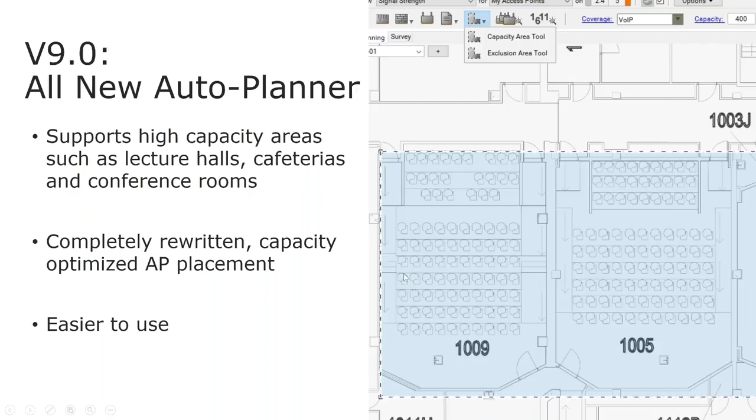So previously you were able to just draw areas and define capacity across the floor or across the building. But 9.0 has been completely refactored in terms of the auto planner with high capacity areas in mind. So it allows you to define the areas, low capacity areas, high capacity areas, for example, lecture halls, things like that. And the whole thing is completely rewritten, not just the auto planner, but the capacity analysis part as well. And it's easier to use, which I'm sure you will see pretty soon.

A couple of new features that we needed to add to the auto planner: since Wi-Fi evolves, so must our auto planner. So the auto planner now supports dual 5 GHz APs. It's pretty conservative in moving the APs to dual 5, but Mikko, isn't the feature such that you can check whether you want to use dual 5 or not, and then it will use that, of course, if available in the APs? That is correct. And how many APs do we have that support dual 5? The Cisco 3800, some of the Aerohive 250. Yeah, was it something like 4 or 5? I don't exactly recall that, but basically all of the available APs that support the dual 5 gig mode.

Okay, very cool. And I guess the more significant feature for most people is that it also disables unnecessary 2.4 GHz radios. We'll take a look at that as well. But it only disables 2.4 GHz radios if it sees that there's still enough coverage on 2.4. So if you, for example, have quite a big offset in terms of transmit power, a much lower transmit power on 2.4 and a much higher one on 5, then it may choose not to disable 2.4 radios because you might not get enough coverage. The tool also prevents AP overpopulation.

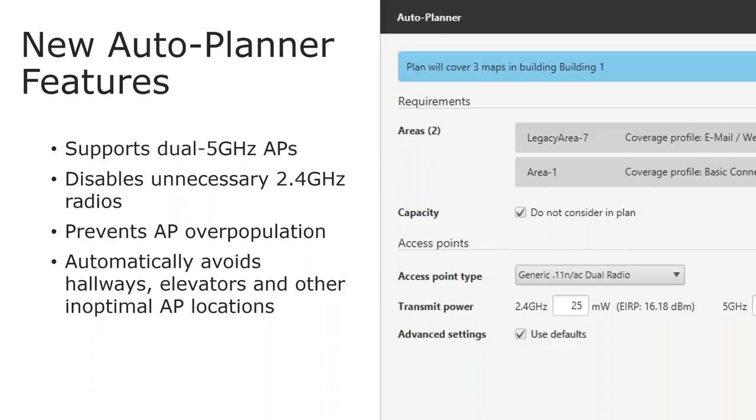And using a similar idea but different implementation, the autoplanner now understands where the hallways are, where the elevators are, without you marking them on the map, and it tends to avoid placing APs where possible in the hallways, in the elevators. So it just makes the planning process a bit more quick, a bit more simple.

And then the tool provides you more tools for high capacity analysis as well. So one feature that we are very proud of and that we put a lot of effort into is the airtime utilization heat map. It allows you to analyze the Wi-Fi air in quite a robust and accurate manner, and we'll take a look at that during the demo as well.

It just makes Wi-Fi more understandable and gives you guidance on what factors you should consider when making the network design, whether band steering or transmit power differences, or minimizing the amount of management frames with low data rates, things like that, by disabling low data rates.

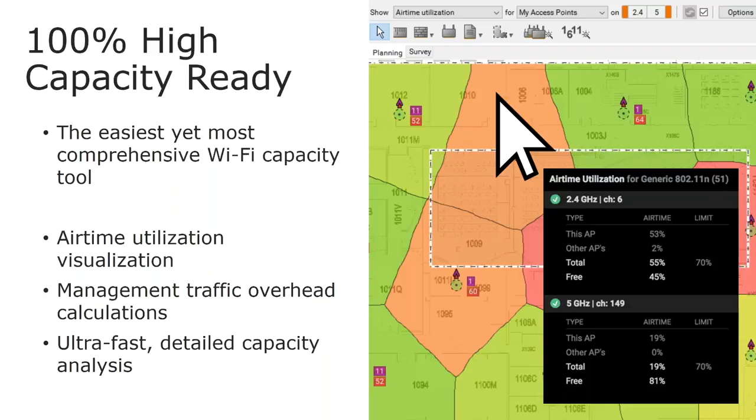So that's all I have in terms of the slides. So I think we're good to go for a demo. There are certainly questions, and we already received several questions. Just a second here, let me switch to the application. So just to address a couple of frequently asked questions.

First one is, I'm now on 8.7, how will I get 9.0? So if you have a valid annual support contract with Ekahau, the 9.0 upgrade is free. You can just simply start ESS and it will tell you a new version is available, hit the download button, and there you go. There are no additional charges or fees involved. So pretty simple upgrade.

And the other frequently asked question is backward compatibility. So version 9.0 can read files from the older versions as always, but if some of your teammates are running 8.7, for example, and you update to 9.0 and save a project, then your team members on the older versions of the tool will not be able to open those. Mikko, is that correct? And have any other frequently asked questions popped up already?

So I only heard the last question. Yes, we do have lots of questions, but what was the question before that? I'm all busy already replying to all the questions. Yeah, I mean, how do I get the tool and valid support contract, stuff like that?

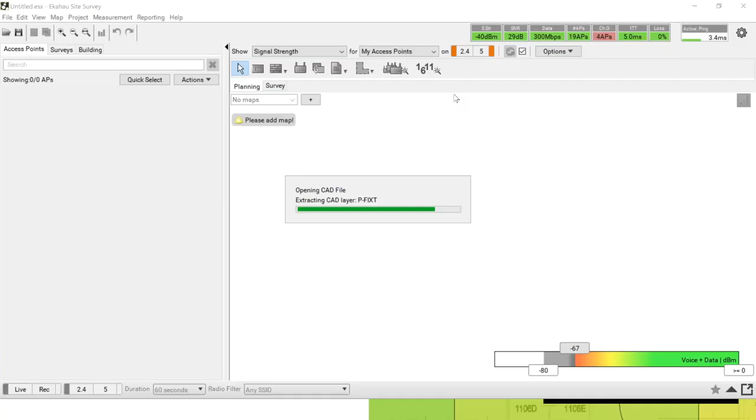So as always, we start by adding a map, and this is a university map that I've found on the internet. Thank you, universities, for sharing your floor plans there. It's much appreciated. Going to just change the layout. And this is a typical CAD floor plan, right? Pretty typical, but also the best case scenario in the sense that there are just a few layers on the CAD drawing. The scale comes automatically as always.

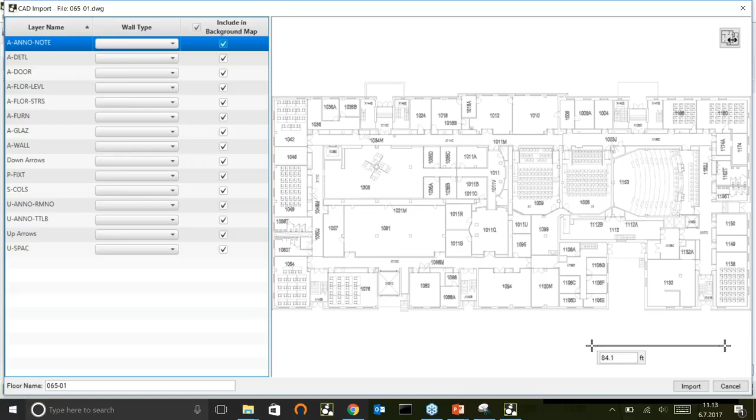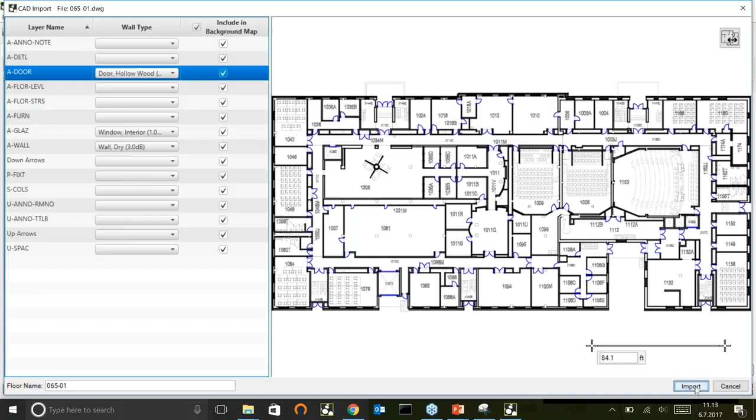Then, as you can see, blue color indicates interior walls, so we will map that as drywall. And then we have some windows, or Glas, as us Germans would call it. Also gonna put in the doors. And that looks pretty solid. I mean, we can work with that. Scale seems correct, so we'll just hit import.

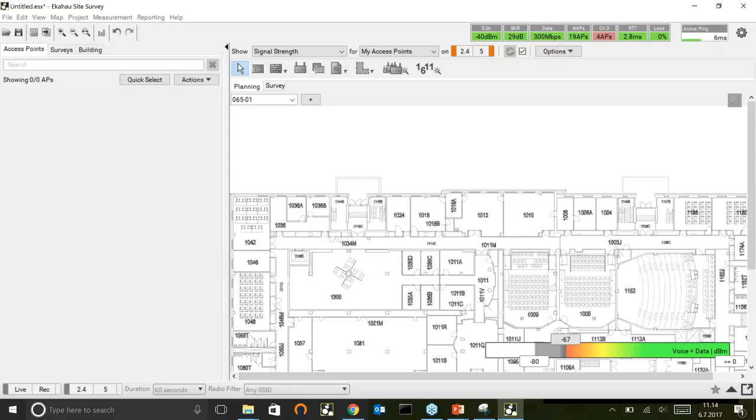Just to have a floor plan, and the CAD import, as you know, has been there already since 8.0 maybe. So nothing new really here. There we go. That's a pretty decent floor plan right there. And if we go and see the walls, yeah, there's the walls, there's the windows, it's all there. I'm just gonna hide it because we won't be needing those.

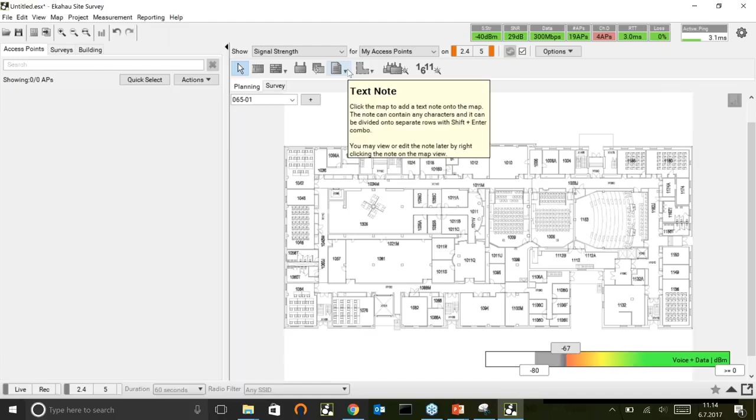All right, then off to the new stuff in 9.0. First of all, there's the area tool, which is now two different tools actually. It's the area and the exclusion area. And the area is used for both capacity planning and plain coverage planning. And it works pretty simply. You take the area tool. Here we have the selector for what kind of coverage you want to deploy.

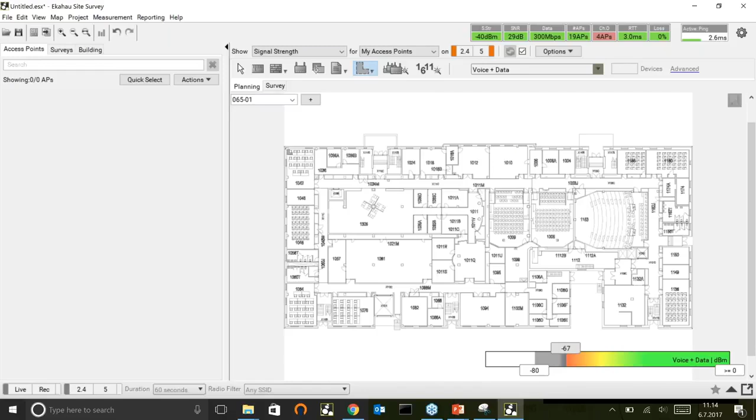So we're going to do the basic voice plus data, which means, if I recall right, is it -67 or -65, something like that. But a pretty general best practice for voice. Mikko, you worked on the profile. What's our requirement for the voice and data? Was it -65 or -67, -67 most likely. All right, and of course we can go and tweak that as well. There you have it in the legend actually. Yeah, exactly. -67. There it is.

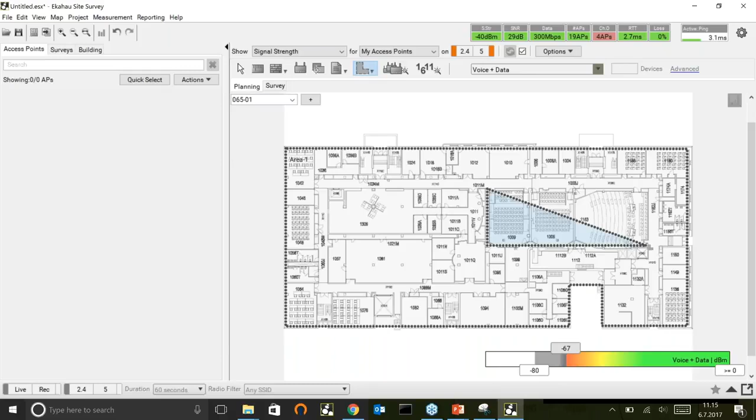So for the entire building, let's say we have a couple of hundred devices joining the network. So just punch it in here. So that area will now be designed for 200 devices and voice data. But then we have these lecture halls here in the middle, don't we? At least that's what it looks like, classrooms, lecture halls, stuff like that. And those would be your typical high density area. So I'm going to draw another area there and punch in 300 devices on that area.

There we go. So now what happens is these conference rooms obviously will have 300 devices supported, and then the rest of the area, excluding the conference rooms, will have 200 devices. Fair enough. And by default, the 300 devices, for example, means we have 150 laptops and 150 smartphones, because typically people carry both of them with them. And if we go to the advanced, we can see how that was divided.

So laptops with a pretty low SLA of 2 megabits per second, and of course all this is adjustable. And the smartphones, it's kind of assumed that people are using their laptops and they will have smartphones on the table just doing background synchronization and stuff like that. But all of them will be associated to the network still. So obviously you can change the number of devices, the type of devices, and the applications run on the device. And this is relevant for many reasons. Of course, how much applications are being utilized completely dominates the capacity planning of the network.

And also, if these clients are running VoIP, then the airtime saturation will happen sooner for VoIP clients than if you're using plain data. For example, with plain data, it's okay to have like 60, even 70% airtime utilization of the network, but for VoIP clients, 30% is already pretty much the maximum, if I recall right. So we'll just treat VoIP a bit differently, and we'll take a look at how that works.

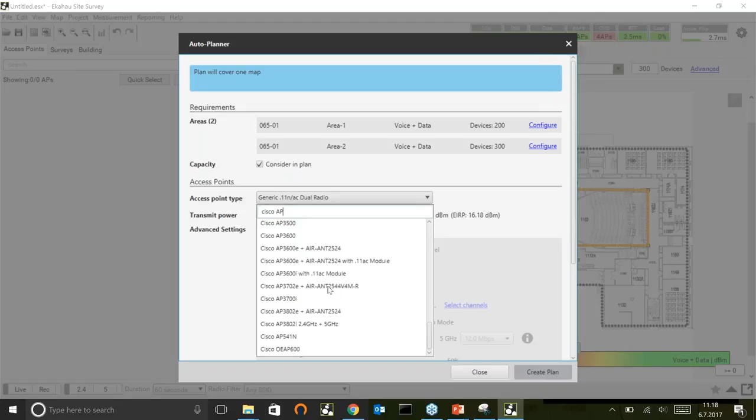So what do we do now? Now comes the new auto planner into the picture. We have defined the capacity, and at the simplest, it's just drawing the areas, putting in the numbers. So as we can see, we have 2 areas with 200 and 300 devices. We will consider capacity in the plan. We will put in, let's say, Cisco 3800s here. And by the way, we incorporated the search tool also in here, so it's easier for you to filter out the unwanted APs, stuff like that.

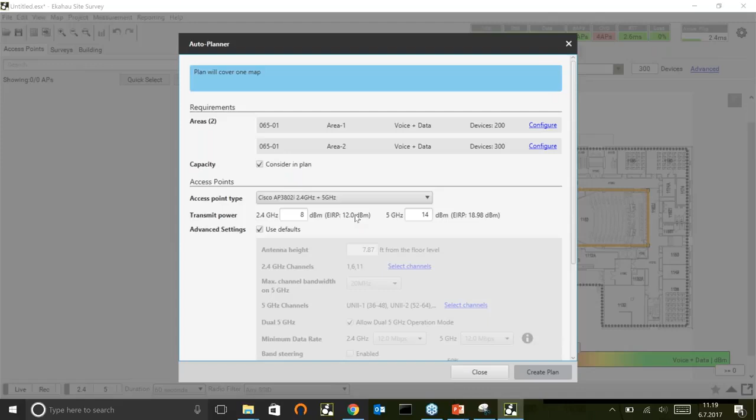So we're deploying Cisco AP 3800, 2.4 and 5 gigahertz configuration. And this is the ESS default. So we kind of try to steer you towards reasonable network plans by adjusting the default transmit power level. So we put them at 8 dBm for 2.4 and 14 dBm on 5 gigahertz. And that's kind of a reasonable default in our opinion. It could be 6 and 12 as well, but that's okay for now.

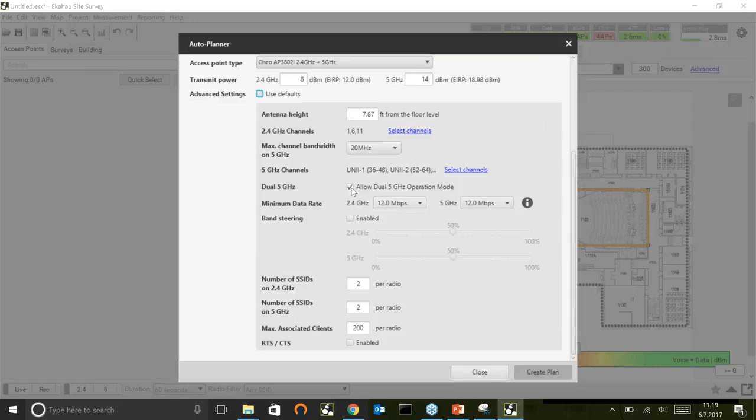Then we can use the advanced settings. There's a lot of new stuff here. For example, allow dual 5 gigahertz mode and individual selection of the channels being supported.

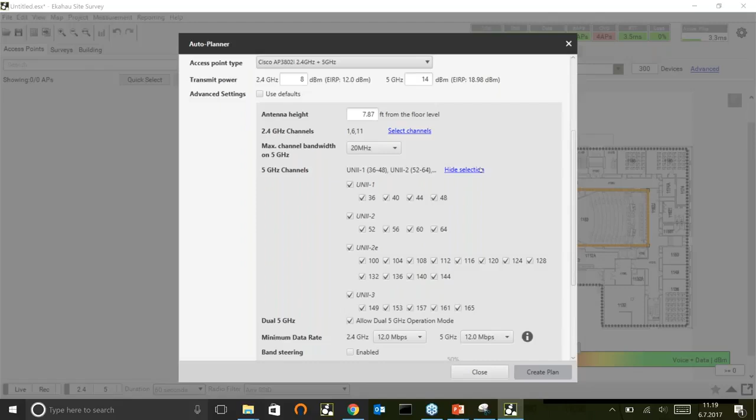Mikko, wasn't it so that this was a pretty frequently asked feature? Oh, absolutely. How many requests did you get for selecting the individual channels? Dozens, right? Absolutely, something that I didn't count anymore. Customers do keep on reminding us what is truly important, and this was definitely one of those features that we just had to do. Exactly, gun to your head kind of a thing.

Another thing that really matters when designing the Wi-Fi network is minimum data rates. So actually, I've been touring around the US now and been to, for example, different Marriotts. And greetings to IBAN. Could you please disable lower data rates in your networks, because it would function much better. So most of the Marriotts actually have all the lower data rates enabled, and excessive management frames, especially on 2.4.

Anyways, then there's a band steering configuration. So if your infrastructure supports band steering, you can set the targeted percentage of clients to associate on 2.4 and 5. But we're going to leave it disabled for now. Then you have the number of SSIDs, which also affects heavily the amount of management frames.

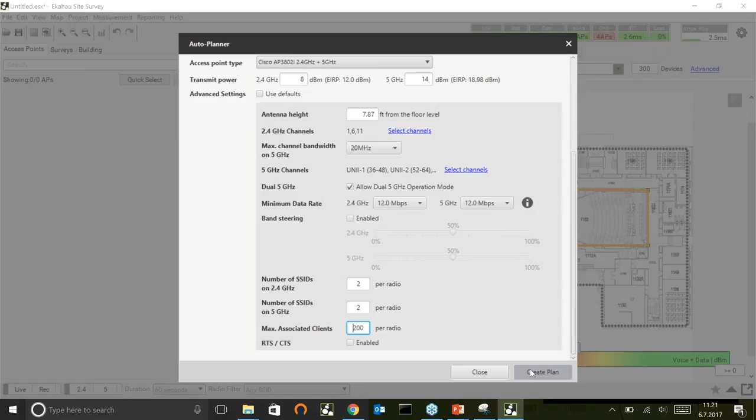And then you have maximum associated clients per radio. And this is not like maximum amount of VoIP calls per radio. We address that automatically in the tool with the visualizations. This is the association limit. Let's say if you have a humongous number of client devices just associated in the network, then this would be that, not the VoIP call limit. So we'll leave it at 200. It could be 100 or 50 or whatever. Then we'll hit create plan.

And it takes its time to kind of crunch the numbers, looks at capacity, looks at coverage, and gives you a warning. It pretty easily gives you the warning that all requirements may not be met. Please review requirements. And this is also there just so that a capable Wi-Fi engineer should always look at the plan. Although ESS these days, as you can see, makes solid network plans, the Wi-Fi engineer should still review the plan and adjust accordingly.

So as we can see here, how did the layout turn out? Pretty cool, actually. It's pretty close to what I would probably design myself as well for this kind of a network. So a couple of APs in the hallways, but most of them in the rooms. The high capacity area has more APs. There's less APs in the non-high capacity areas. We have just one 2.4 gigahertz radio disabled. It is because 2.4 was already set to a much lower transmit power than 5 gigahertz.

So Jerry, Nick, since you guys have actually designed and deployed networks for a long time for a living, what do you think of the plan? Oh, and actually, sorry, there's another 2.4 disabled here. But what do you think of the plan? I think it looks like a solid design. I think the spacing of the APs, staggering them out, looks solid.

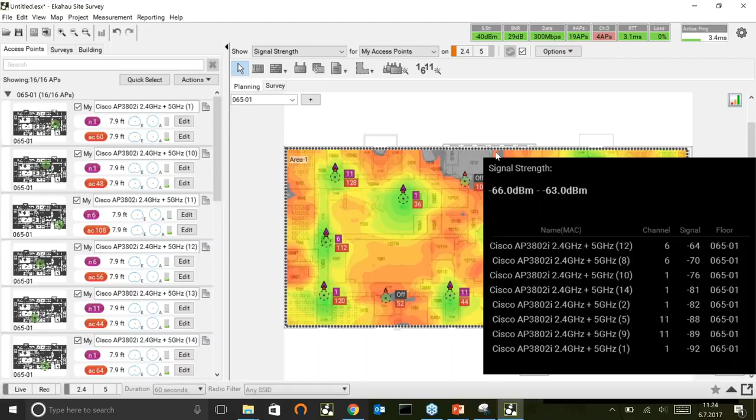Exactly, and unlike before, the algorithm stops when the spectrum is fully utilized, it doesn't add any more APs, so it never overpopulates, which is one of the key things here as well. So let's see how the plan looks on 5 gigahertz. Yeah, solid coverage, and on 2.4, solid coverage as well. But where we disabled the 2.4 radio, there actually is a small coverage gap here. So always review the design, go back, readjust if necessary.

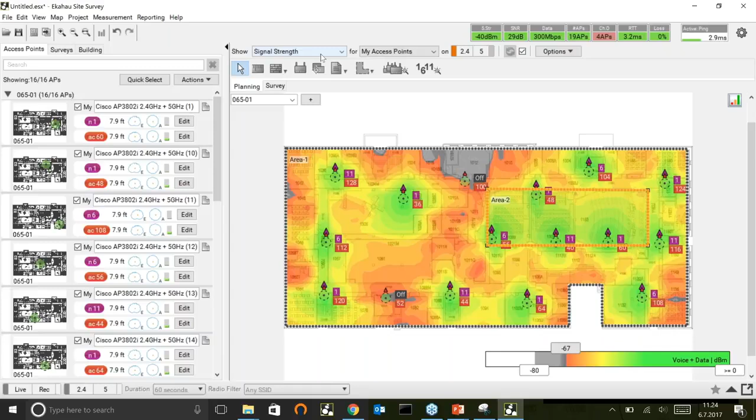However, one could argue that that's fine if your clients are mostly or all of them are 5 gigahertz capable. Then that kind of gap might be fine. And there's still coverage there, but it's just below -67. But again, always review the design. So that's signal strength. Let's look at channel overlap as well.

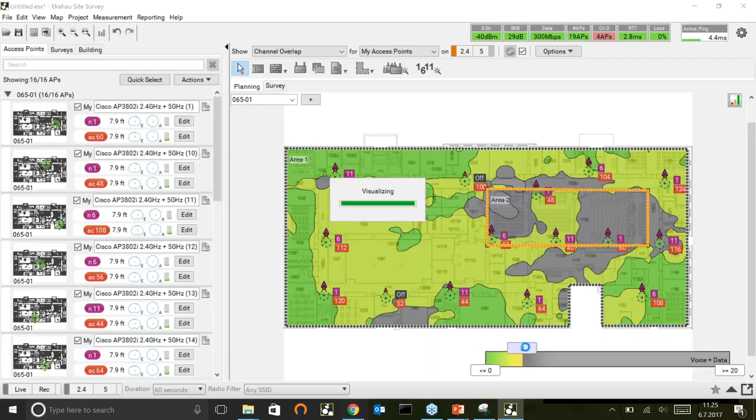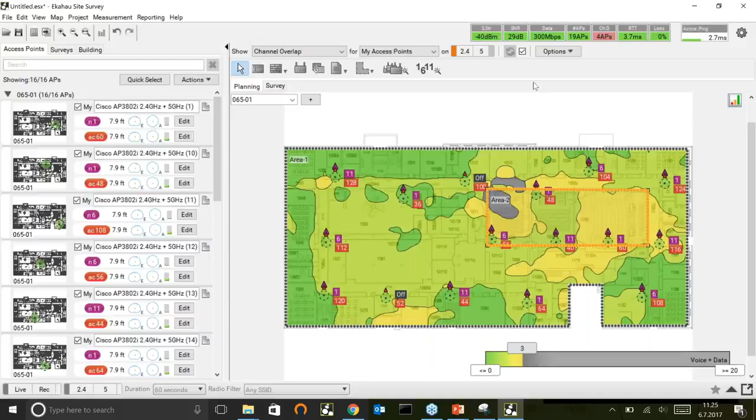So still pretty reasonable. In the high density area, there's no avoiding it. There will be some channel overlap, and we have a pretty strict requirement of 2 APs. So if we look at a bit more forgiving scenario of 3 APs, we can see that, yeah, actually the channel overlap is not awesomely extensive anywhere in the area. So pretty solid, and I'm assuming on 5 gigahertz, yeah, there's no channel overlap whatsoever because the channel planning algorithm did its job. So pretty good.

So far, so good. And here comes the new stuff. So first of all, capacity health is still there, but the capacity calculations are now just much more accurate. So let's look at capacity health to see if the network meets the capacity requirements that we have, which were pretty strict, like 300 clients in a pretty small area. And due to the extensive amount of client devices here, the tool does calculate for a while.

Good time to sip some coffee. So Mikko, how are you? How's Finland, Mikko? Wait, what? Nothing, just making a conversation. It's pretty cold. Oh yeah, I was trying to focus on the questions. Thanks, Jussi. Yeah, it's typical. I'm horrible like that. Sorry about that.

Anyway, so looking at capacity health on both 2.4 and 5, things look solid. So there's no red anywhere. So it does meet the airtime requirements, and there's of course no excessive number of clients. And by moving the mouse over any of the serving areas of the AP, we can see what's going on on those channels where the AP is serving at that location. So on 2.4, in this location, the AP is on channel 1. We have 46% airtime utilized. We have X number of clients there.

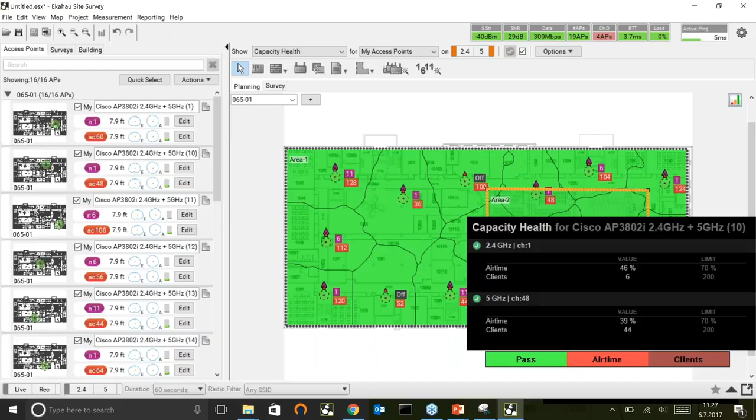And then on 5 gigahertz, by far most of the clients are on 5 gigahertz, which is how it's supposed to be. And then 39% airtime utilized. Okay, so far so good, and our artificial band steering using transmit power differences seems to be doing its job. The network's solid. Let's look at this a bit further. Let's look at airtime utilization. This is a new heat map that we came out with to give you better tools for analyzing the capacity.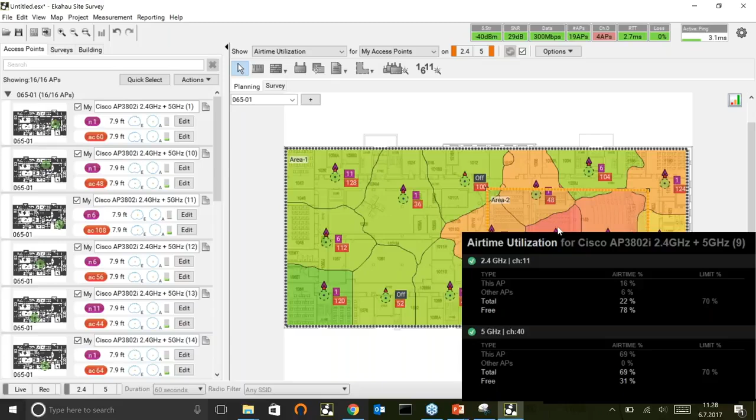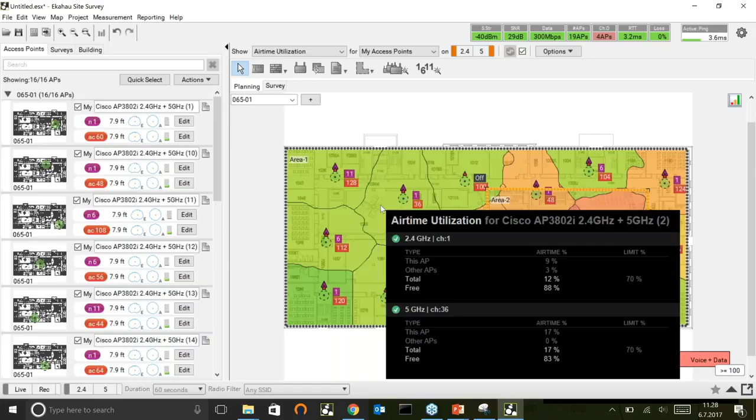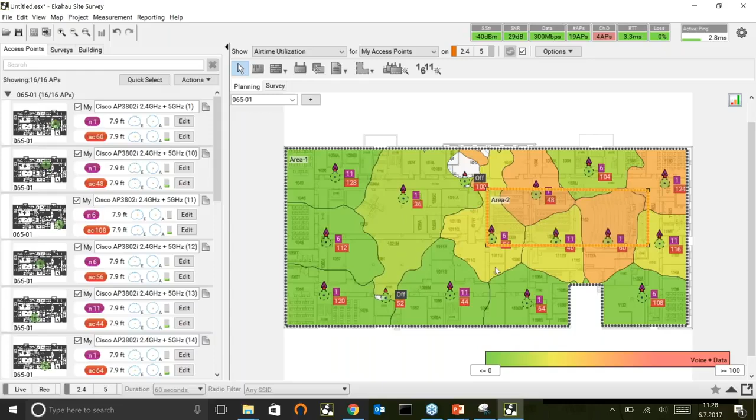Let's look at another AP here. There we can see that there's plenty of airtime available. On 5 gigahertz, we utilize just 17%. On 2.4, we utilize just 12%. That's one side of the story. The other side is, let's look at 2.4 gigahertz only. And we can see how much airtime is obviously utilized on 2.4, but then the tooltip gives us now more details on what's going on in the air.

So we can see on channel 6 in this location, how much is this AP consuming the airtime, how much are the other APs, so CCI, essentially, how much are the other APs consuming the airtime on the serving area of this AP. We can see how much the applications are using the airtime, different apps. We can see how the different clients are utilizing the airtime. And more importantly, we can see what frame types are utilizing the airtime.

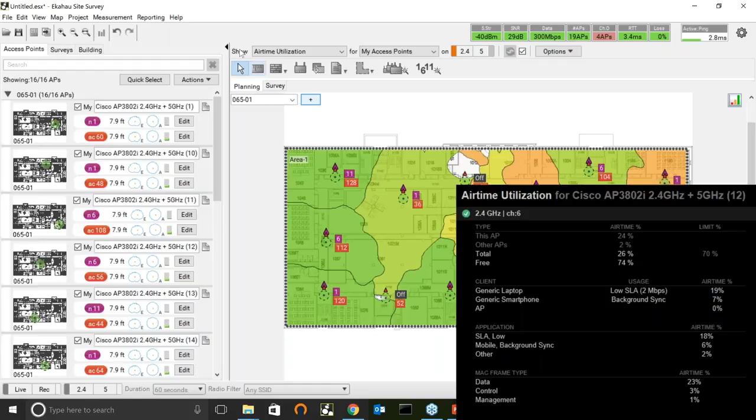So in this case, it seems solid. So 23% is consumed by data frames, so the vast majority, and then just 3% control and 1% management frames. So in that sense, also a pretty solid network, right? So this is all good, and we can see that, yeah, it's actually a pretty decent design that it made, and we provide you with tools to analyze the capacity quite effectively.

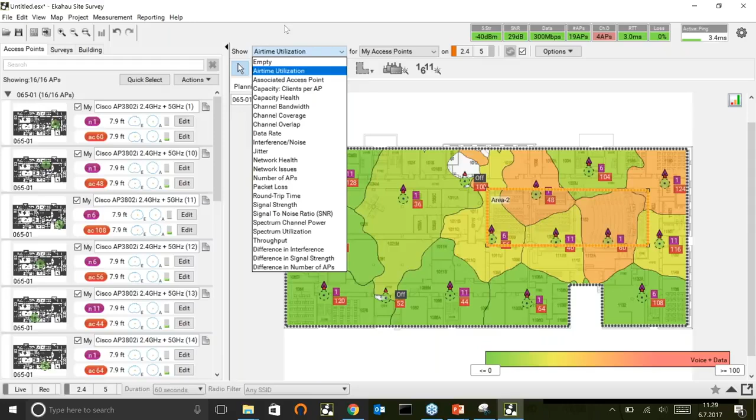But then let's do the typical mistake of making a not so solid network. So let's run the autoplanner again, and now this is like a don't try this at home kind of scenario. So we're intentionally making a bad network here.

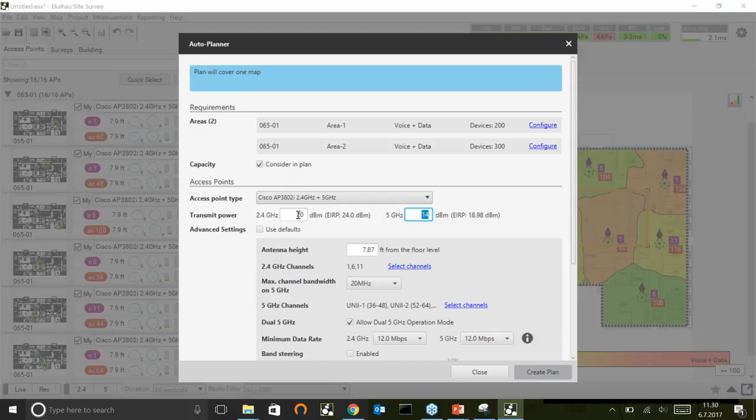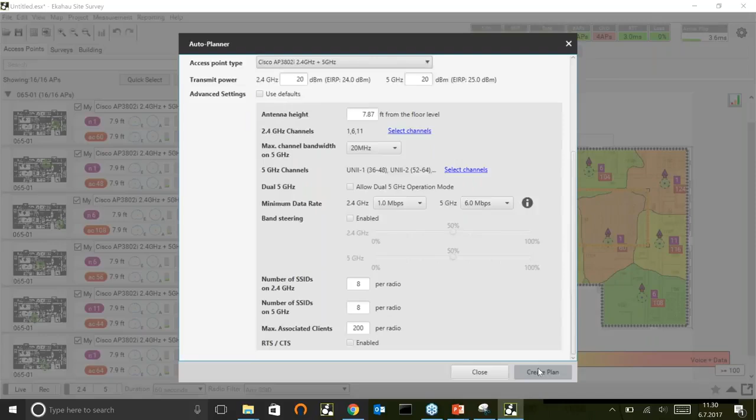I'm going to put in 20 dBm transmit power on both 2.4 and 5, so blasting full power on both radios, which is tempting, but hardly ideal in most cases. I'm disabling dual 5, I'm setting the minimum data rates to the lowest, so 1 and 6 megabits per second, and oh yeah, the more SSIDs, the better, right? So no, it's really not, but let's assume the customer wanted to blast full power, tons of SSIDs, all data rates supported, just plain don't-try-this-at-home type of a plan.

And then we recreate it with the autoplanner. Sure, the autoplanner will not refuse to make the network, just as we as Wi-Fi engineers don't refuse to make a network for the customer, even if the customer demands may be a bit interesting at times. So here we go. The autoplanner did a fairly similar network, but due to the maximal transmit power, it just could not place the APs as close to one another as before.

And then comes the interesting part once the calculation finishes, how much airtime is being utilized with this AP configuration. We'll look at 2.4 gigahertz here first. So how's 2.4 looking for this AP where we have the red color? Yeah, it looks pretty bad. 76% utilization, so over the limit, and the beef is below here. 21% of the airtime is utilized by management frames, which is hardly ideal. And this is because we increased the number of SSIDs and we supported the low data rates.

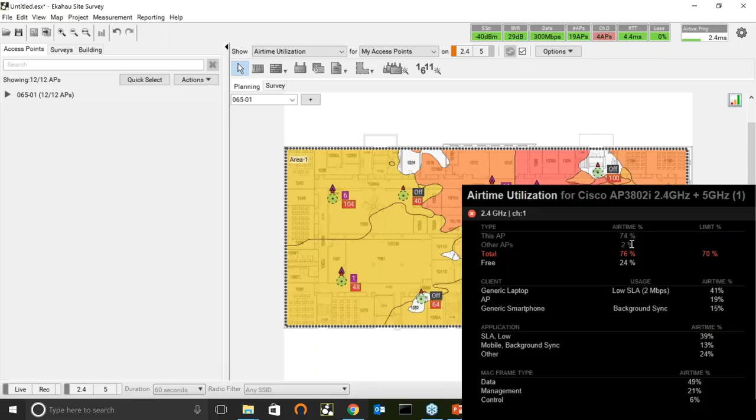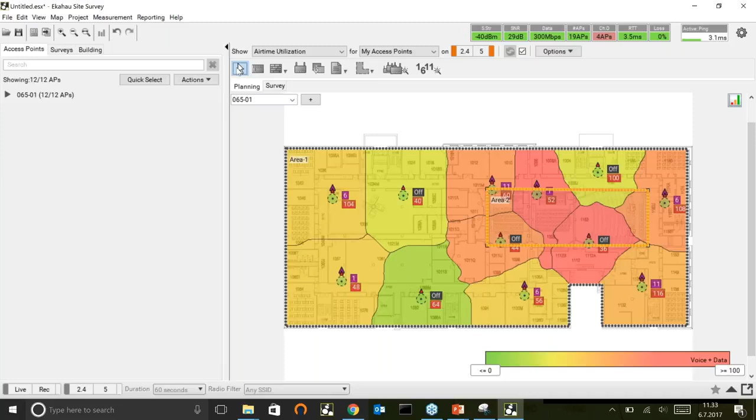Also, since the planner tries to avoid CCI, it made a pretty sparse network design. So we are only getting 2% airtime from other APs here, which is reasonable, right? But you can hardly make a plan like this work given the extensive amount of management frames. Of course, we could do some remedy measures here by utilizing band steering and trying to talk sense to the customer, trying to minimize the number of SSIDs, stuff like that. But that's kind of how things work.

Hey, yes, you had a good question about how do we define areas where we don't want coverage, where we don't want to be included in our design. Good question, Nick. Very good question, actually. Oh, and now I recalculated, so it will take a while. But there's a subset in the area tool called exclusion area, which then will exclude the areas from the design. It's a similar area drawing tool. I'll show it to you in a second.

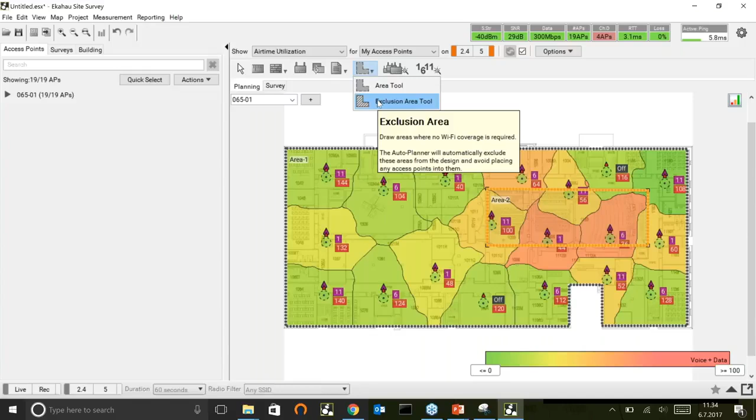It's a similar area drawing tool. But as mentioned earlier, elevators, things like that, the algorithm tries to naturally avoid, like small closets and elevators and obviously unreasonable locations for APs. So here's the exclusion area tool, similar to the area tool. Just press the down arrow here. You can utilize that. Good question, though.

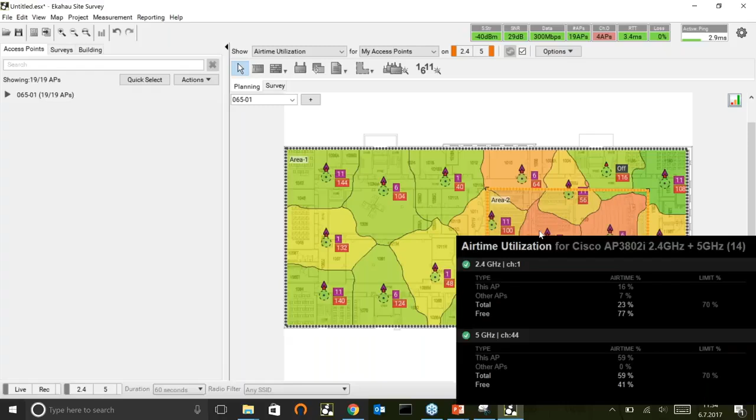Okay, so one more scenario that we could build here. Right now, I redesigned the network with a more reasonable transmit power configuration, and it looks solid again. You can access the network configuration later after running the autoplanner from project network configuration. Now we have reasonable minimum data rates, reasonable number of SSIDs per radio, no band steering. So what I'm going to do, and I don't think I've tried this with the 9.0, is introduce some legacy clients here and try to break the network that way.

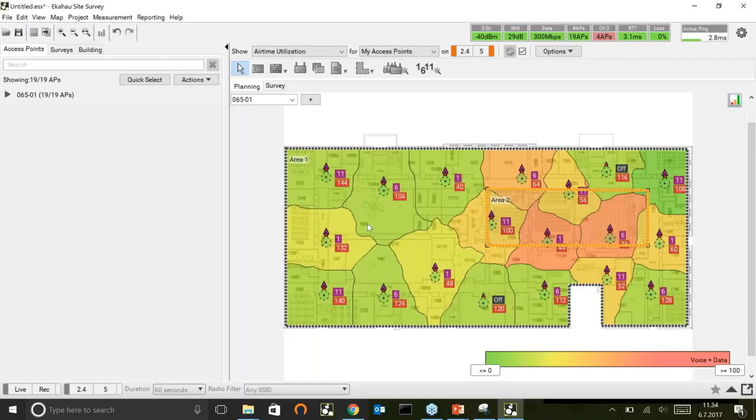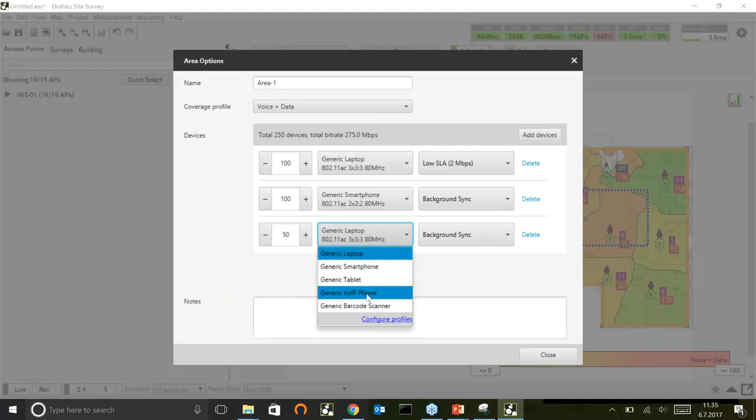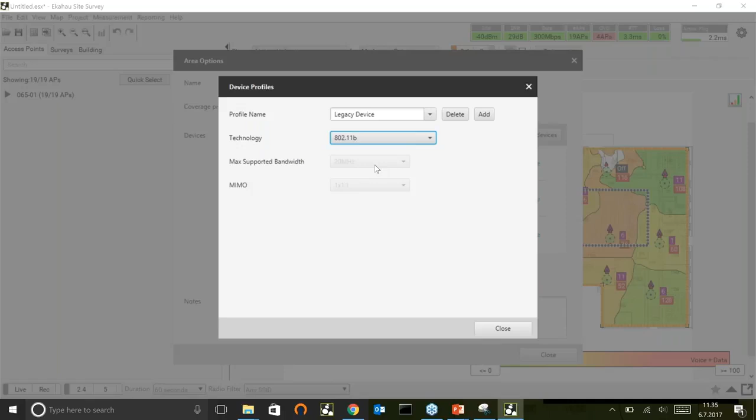So for example, on 2.4. 2.4 for now with this client device setup looks pretty good. So let's right click on the area, edit, and introduce some legacy devices into the network and see what happens. We have a generic barcode scanner. Mikko, do you remember what kind of barcode scanner we have? It's like 802.11b, is that correct? Yes. So let's put in a generic legacy device. Here we go. And then 802.11b, obviously 20 megahertz.

All right, so now we have 50 legacy devices in the network doing 2 megabits per second, which is pretty much the maximum they could do anyway, and then let's recalculate and see what happens. Only 50 more devices added, but those are 802.11b. So what happens to the network? Again, looking at 2.4 gigahertz, which obviously is where those devices would be added. This is also one more tool to convince your customer that it might be a good idea to update those legacy barcode scanners or whatever legacy devices you may have into something more modern, so to speak.

Time to sip some coffee. That's good coffee. I highly recommend Jittery Joe's coffee in Athens.

So we still have green here. Wow.

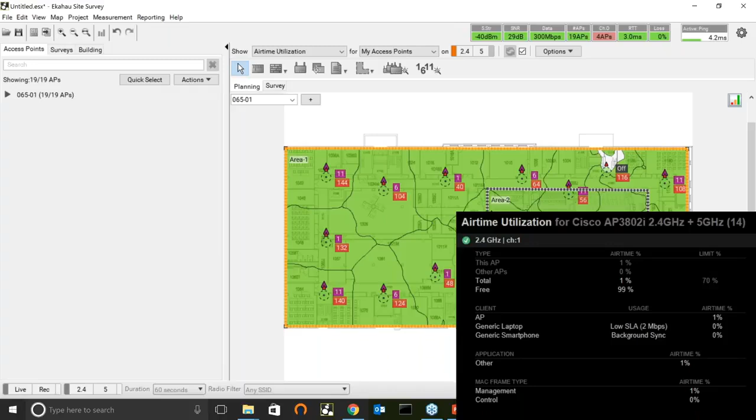Now I would need to go back to the drawing board and understand what was happening here. But it looks like the network can take those client devices. Hard to believe though. I'll come back to that. Could be a demo effect.

Anyway, so that's 9.0. Now would be a good time for any questions we may have. Nick, Jerry, Mikko, any frequently asked questions at this point? Well, one thing that came up yesterday was what happened to the area notes. Great question. Mikko, what happened with the area notes?

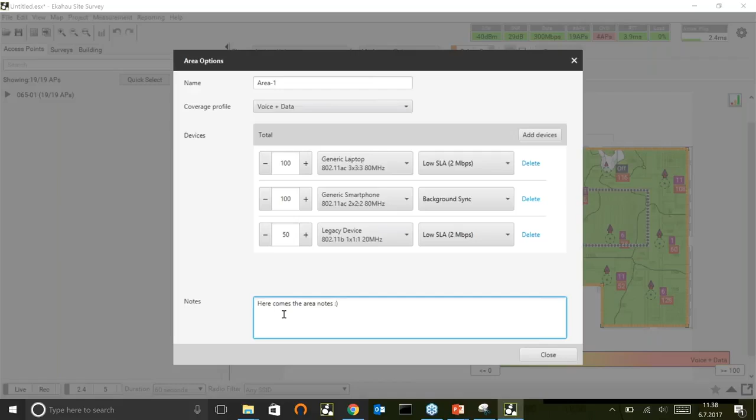Well, what happened was that we moved it under the area tool. So we believe it's now more logical to have it within the same tool, which is used to define your coverage and capacity requirements. Exactly. So if you right-click on the area and say Edit Area, the notes are actually here. The rest of the notes still stay in the same location, right? Any other questions?

There's actually plenty of questions, which is really positive. I haven't been able to reply. So. This is Jerry. I've got one question here. I guess this isn't directly new to ESS 9, but there's a question about the attenuation areas versus walls. Specifically, they were talking about in reference to warehouse shelving.

Excellent question. For those that don't know the concepts, there's a wall tool in ESS to define the walls of the building, obviously, and then there's the attenuation area tool, which is for areas that are larger than walls. But the question is which one should I use for warehouse shelves, walls or attenuation areas? And I would say it depends on the width of the shelf. So if it's a very wide shelf, you could use the attenuation area tool. Otherwise, you could use the wall because it's faster to draw.

But the propagation and calculation is actually identical if you do a similar attenuation area or a wall. Mikko, is that right? All right, you did it again. So if you do a similar attenuation area or a wall, the calculation should be pretty much identical. Absolutely. Yep.

This was pretty much the case after configuring those devices into the network. Hold on, it is still visualizing. So we were looking at 2.4, and I was wondering why it still shows green on 2.4 and hardly any associated devices, even though I had configured the legacy devices there. So it looked like this, just a couple of devices here and there.

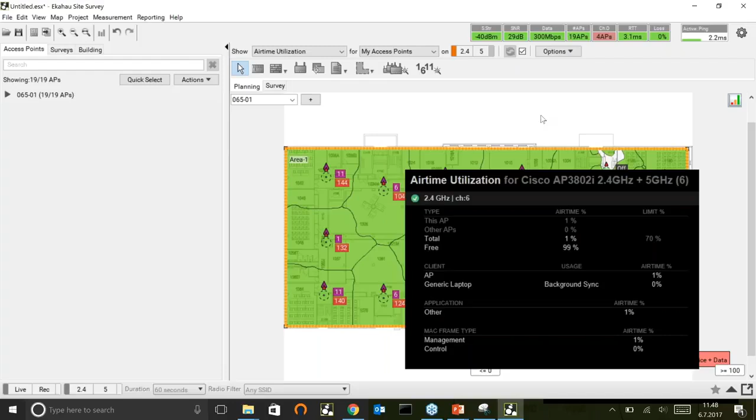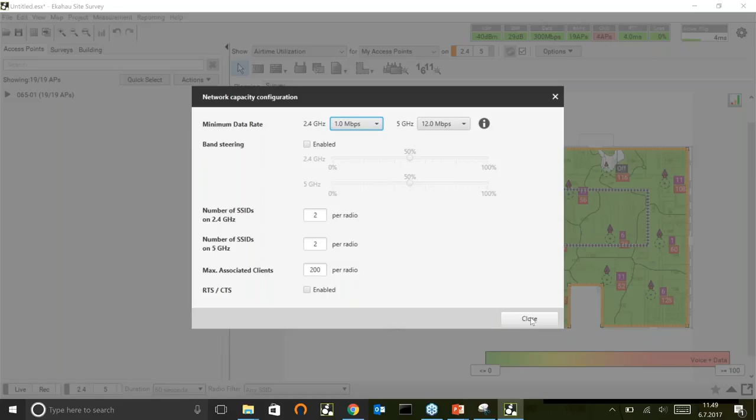And then I realized, I put 802.11b devices into the network, but here's how the network looks. It's not letting any of those 2.4 gigahertz legacy 802.11b devices associate, obviously, given that I've set the minimum data rate to 12 megs per second. So let's drop that to 1 meg per second and recalculate and see what happens. So wait for it, as they say.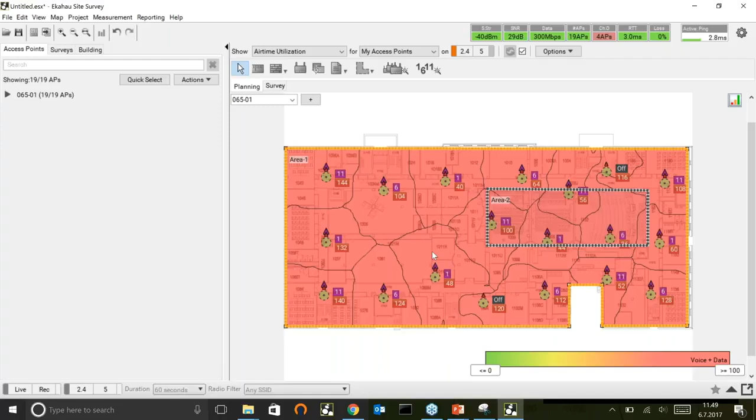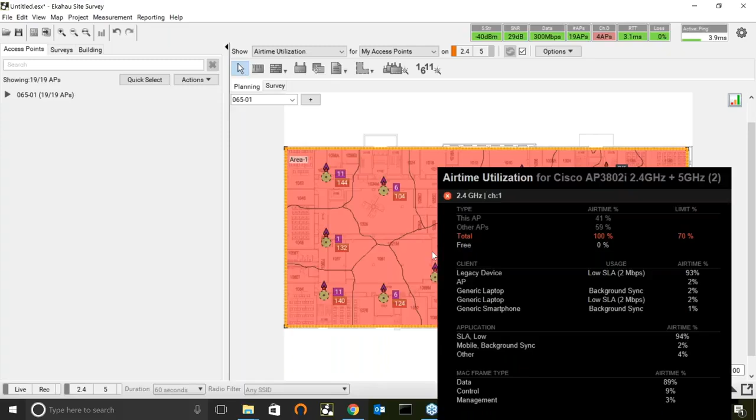So now that we allowed legacy devices to associate, of course, the network is flooded. And bear in mind, we only added 50 802.11b devices, 50, and it's dead. The network is completely ruined, 100% airtime utilization. Even if we put in less devices, let's just put a couple of devices here. So instead of 50 legacy devices, we'll just put 10. Let's see what happens there. And anyway, so that's that.

Was that also Wilfred Todd's answer? Mikko, was that what? That was correct, yes. I guess we need to send him a hoodie. And like Sean Bender says, some Finnish crab candy, right? Exactly. Sean Bender just loves that stuff. We need to publish a video of him eating 10 Finnish licorices, or sorry, Swedish.

So yeah, here's a good example. We just introduced 10 legacy devices into the network, and this is what the airtime utilization looks like. Anyways, so that's that. It's just such a fantastic tool for understanding how Wi-Fi works. Any other questions? Because I'm out of demo.

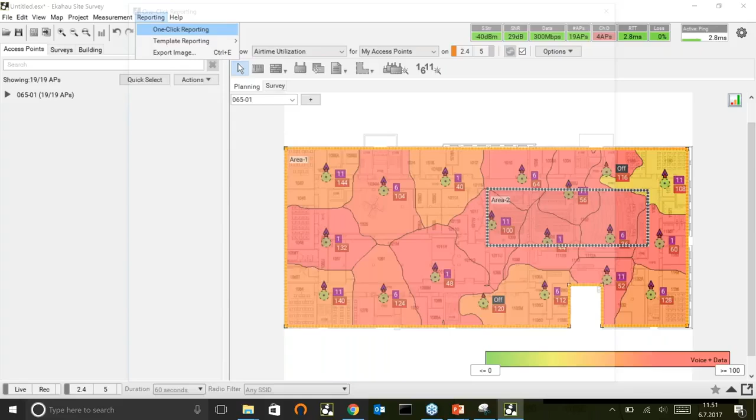Hey, Jussi, would you be able to generate a report, or do you have a report generated? I know there's some pretty new nifty reports to be able to display some of these statistics in the reporting, the one-click reporting now. Oh, there is? Because, to be honest, I've never tried it. I've never touched it. This is how disconnected I am. Mikko, can you talk about the new reporting tool? No. So do we have any?

Yeah, we have the airtime utilization also for capacity and stuff like that. So all the heat maps are obviously there, and there might be some new stuff in the template-based reporting as well. Nick, have you had any time to look at the new template-based reporting? Since you're our template guru.

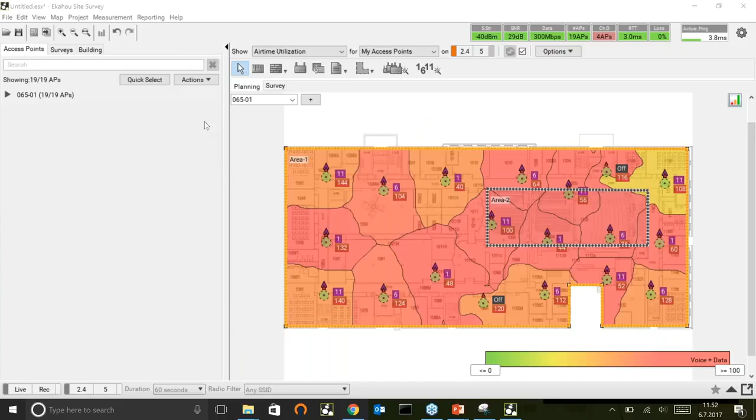Yeah, absolutely. I think the key thing to remember with the template-based reporting is that any visualization that you can create inside Ekahau, we can put into custom report templates. And the advantage when you start playing with the report templates is that you can modify the variables of that visualization. So, for example, one visualization that's important for most reports is a map indicating the AP locations. So by adding the line scale, you can change the size of the AP spot.